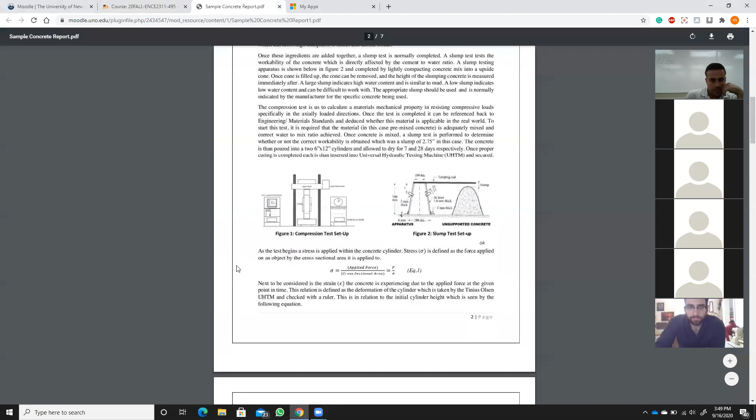So today's data is going to go to your data and result section. And you will combine these data with the 28-day data result. So you're going to have the table. I believe it's on Moodle. If you look at Moodle, you're going to see the Excel spreadsheet template. It shows you the concrete sample calculations. Maybe I can pull it up. Give me 1 second. Slump test, concrete test, and sample report. Let's see. This is the sample report, but I think it has the same information.

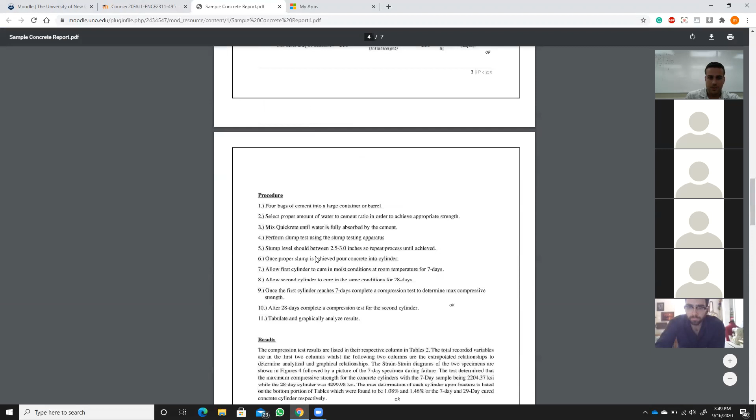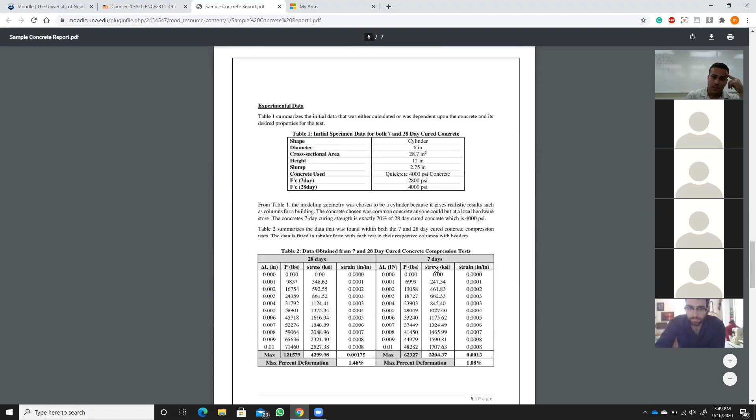So in the first phase, in the last class, we learned the theory sections, and we learned the procedure, how we made the concrete mixture. So you can use the information to develop your first couple of pages, theory and the procedure. You should include the procedure that we have done today as well, how we test this material. And then the data section, it says 7 days right here and 28 days. Table 2 summarizes the data that was found within both the 7 and 28 day cured concrete compression test. So today we only complete the 7 days.

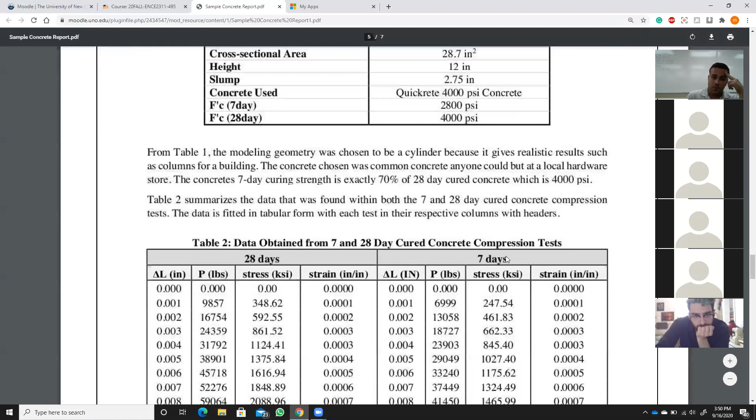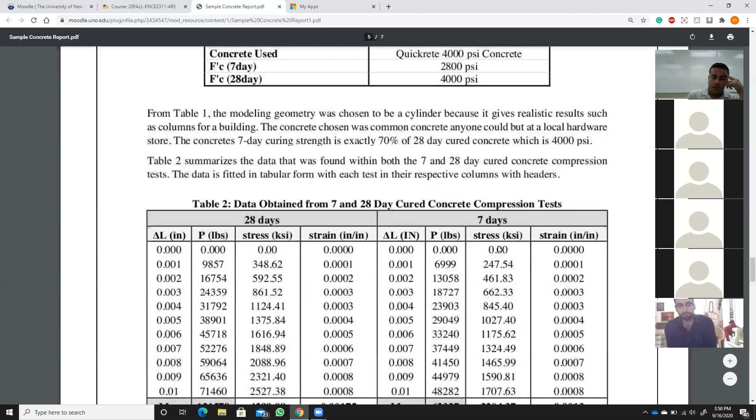What we did, I measured the applied load with the corresponding elongation. And then I will convert applied load and this elongation data to stress. I'll calculate the stress. It's similar to what we have done in the tensile test. And then I will wait 21 more days to get these data. I will collect these data and make my table. Then I will compare. For example, I can compare the maximum percent deformation, and I can compare the maximum compressive strength.

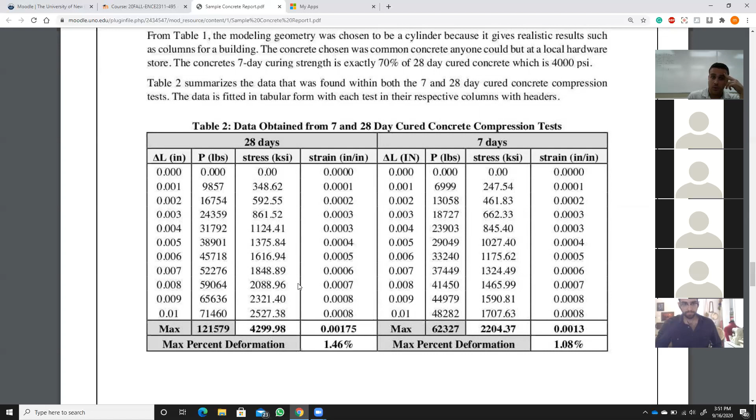So at 28 days, the stress was 4,299, let's say 4.3 KSI. By the way, this unit is wrong, it should be PSI. This is not my report, this was submitted by one of my students. So this is PSI, not KSI. If it was KSI, it could have been 4.3 KSI. And you will compare this F prime C maximum compressive strength to the 7-day result. It is 2200 PSI or 2.2 KSI. And as you can tell, the 7-day compressive strength is almost half of the 28-day result. Why? Because concrete has been cured till 28 days and gained more strength, right?

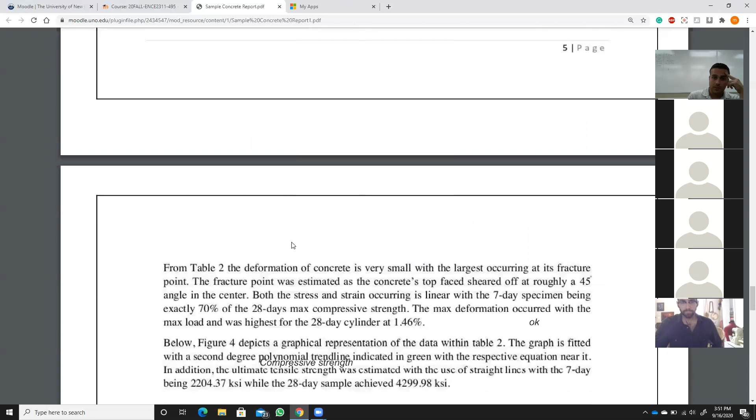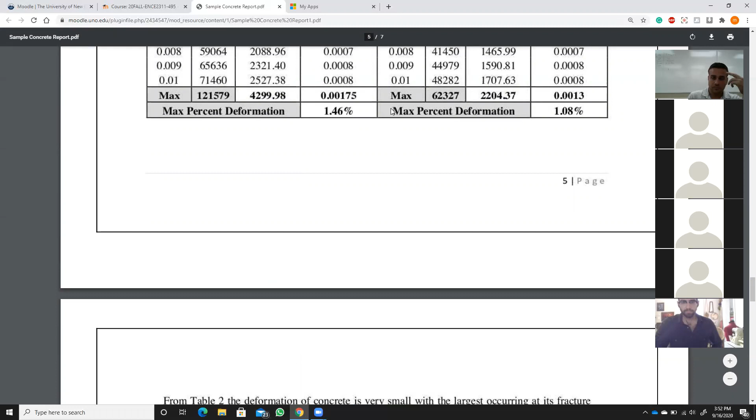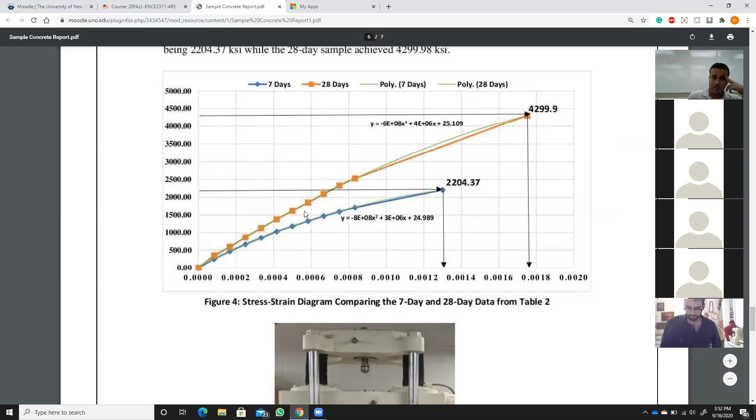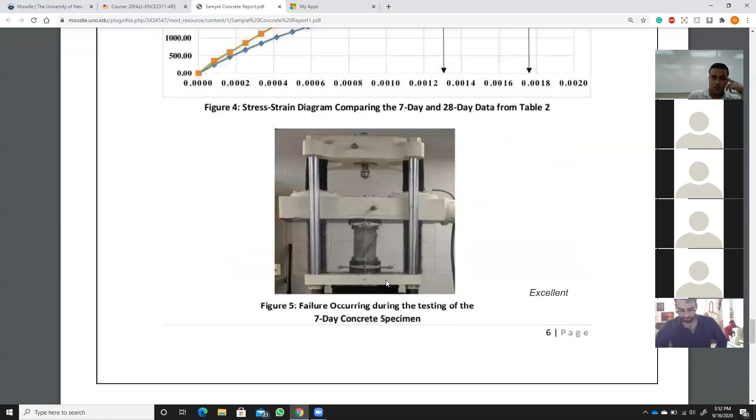So you'll combine these two data sets and make your own table. And you can explain how you analyze these data points and what was the outcome from this experiment. And you should have your graph as well. Once you develop your table, similar to tensile testing, you're gonna have your stress and strain column for 7 days. This is 7 days, blue graph, and you're gonna have 28 days. So you should be able to enter 2 data sets into the same graph. I'm gonna send you guys pictures so you can include them in your report. And then discussion and conclusion. That's it.